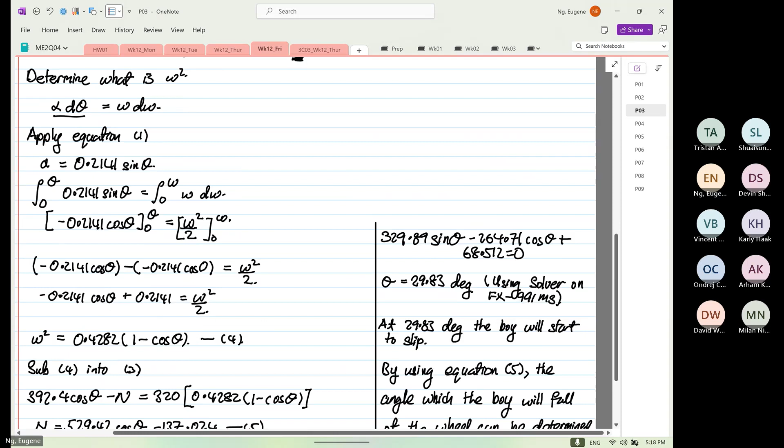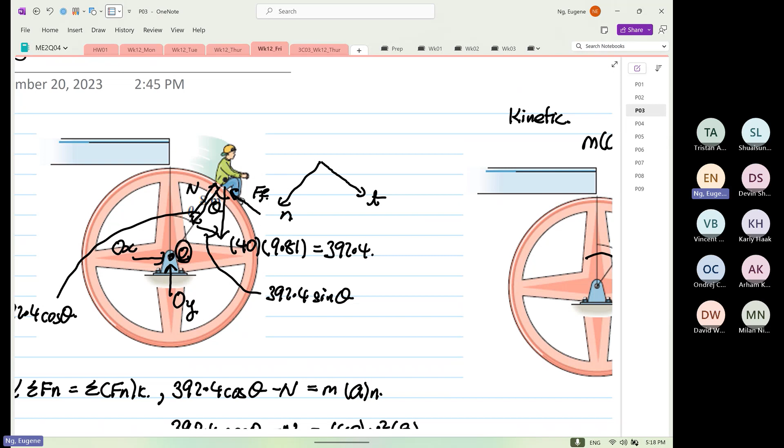So, which value, focus on the boy, okay? Which value will be equal to 0 when the boy falls off? And will be equal to what? 0 when the boy what? Fall off. Okay, so to determine when the boy will fall off, we're going to substitute n is equal to 0 into equation number 5.

So finally, this is 0 is equal to 529.42 cos theta minus 137.024. Theta is equal to 137.024 divided by 529.42, inverse cos, 75 degrees.

So the boy will start to slip. He starts to slip at 29.83 degrees, and then he will roll off. He will go off the wheel at 75 degrees. Are we clear? Okay, this is only true if he doesn't pee himself.

Right? If he panics and starts to piss himself, what will happen? Friction will what? Yes, sir.

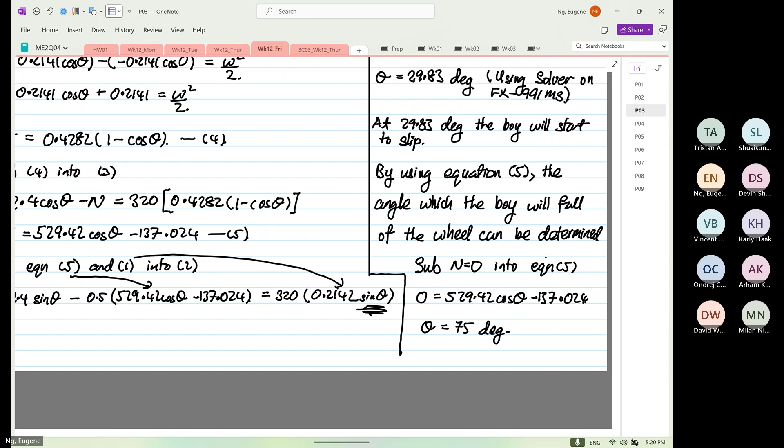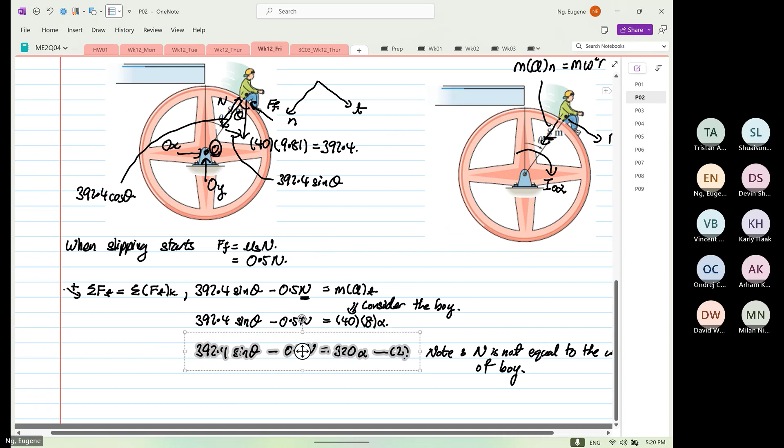Say it again. It's only the wheel. When we were analyzing the wheel, when we were analyzing the wheel alone, that's pretty far back, right? When we were analyzing the wheel on its own, at theta is equal to 0, we just consider the wheel and the boy is not slipping. Then later on, we focus on the what? On the boy, right? Because we don't know what is the what. We have not a clue what is the angular acceleration at all. And we know it's not a constant number.

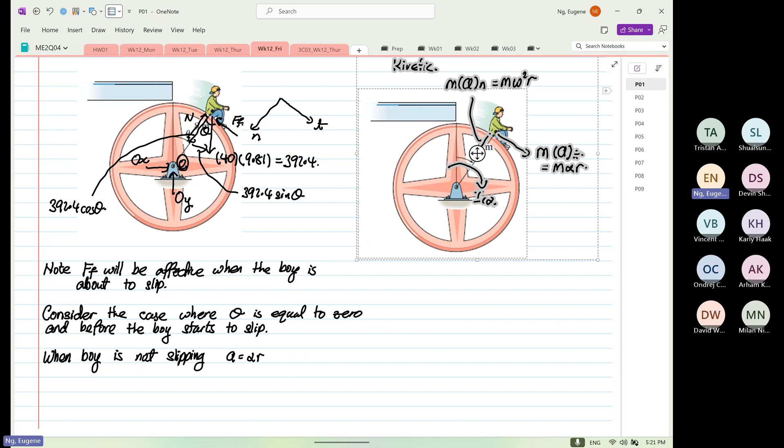Answer your question? Okay, only for that reason, because it's difficult to determine angular acceleration if the boy starts to slip. Okay, not impossible, but difficult. Right. A very interesting question. Now, as I said, if you look at your entire textbook, this is the worst that could happen. I repeat again, this is the worst. Okay. Next, we are going to do an example.

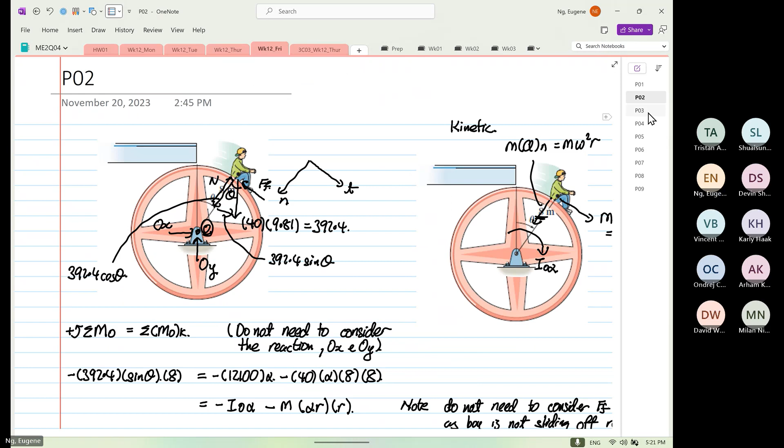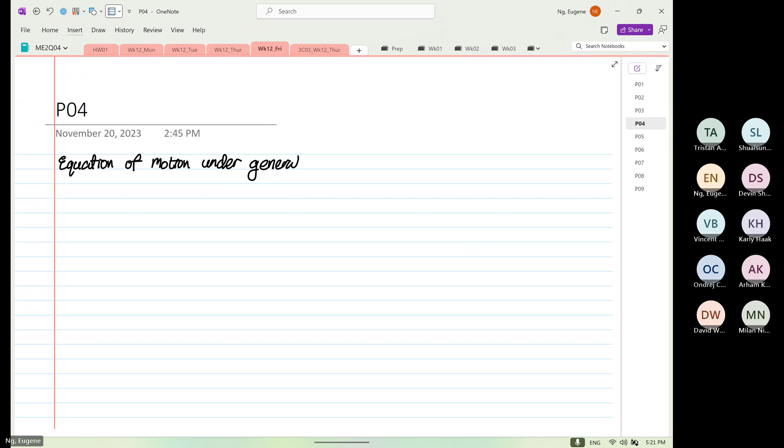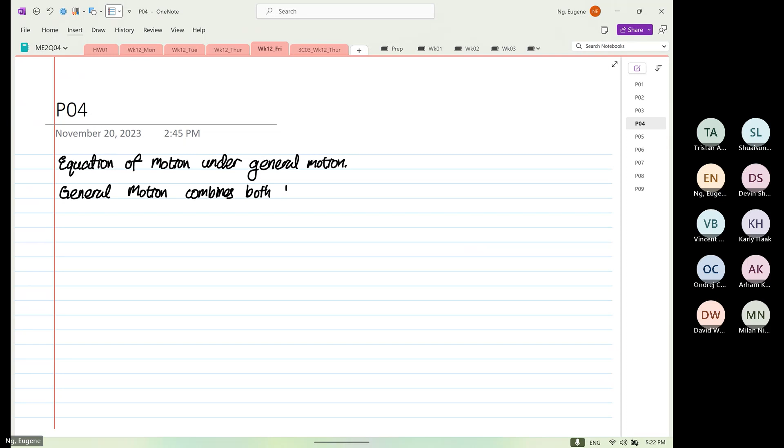Okay, now we are going into equation of motion for general or under general motion. So general motion combines both linear and what? And angular motion. Okay. So the analysis will not change a lot at all, but you just have to be cautious. You just need to focus on how the forces are acting. That's more important. Okay. Right.

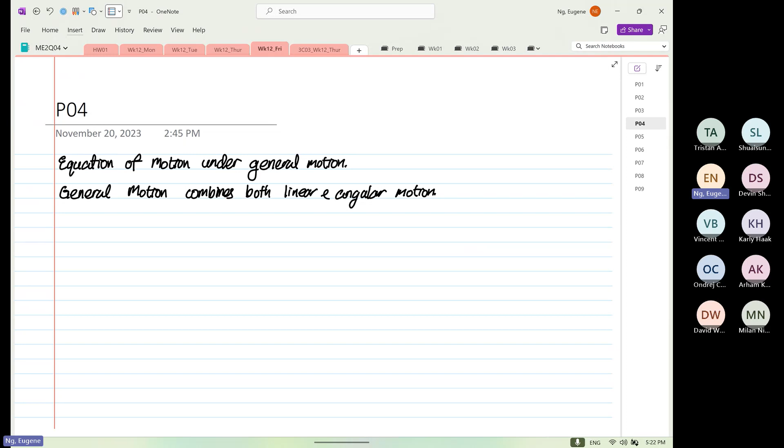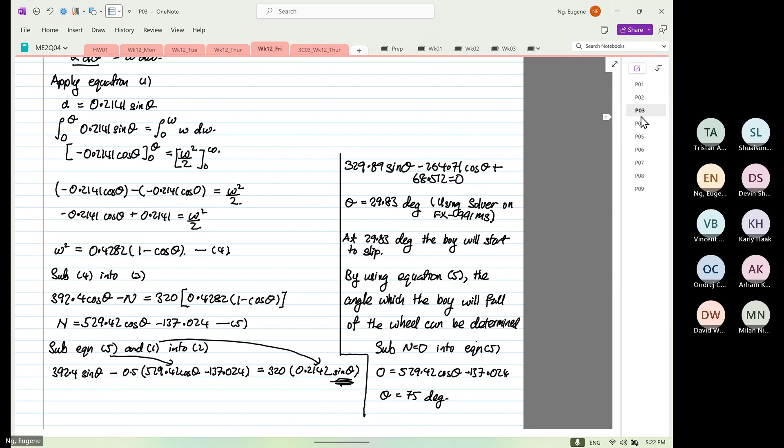So we're going to look into this example now. If P equals 30 pounds, determine the angular acceleration of the 50 pound roller. Assume the roller to be a uniform cylinder and that no slipping occurs.

This question, okay, is not difficult, but you have to focus on this aspect. Okay, which aspect? So the first thing we declare, no slipping. Okay, no slipping, i.e. where there is no slipping, we can use A is equal to alpha R. However, we know that friction force when it's not slipping is not equal to what? Mu N. Okay, so get this into your mind, no slipping.

Now, free rolling, there's another condition known as what? Free rolling, right? Free rolling means what? Remember the car, the front wheels were free rolling. What does it mean? Friction is equal to what? Friction force is equal to what? 0. Free rolling, okay, I'll write down here. When it's free rolling, FF is equal to 0. In real life, is there free rolling? No. Okay. We do free rolling to what? Make the what? Analysis what?

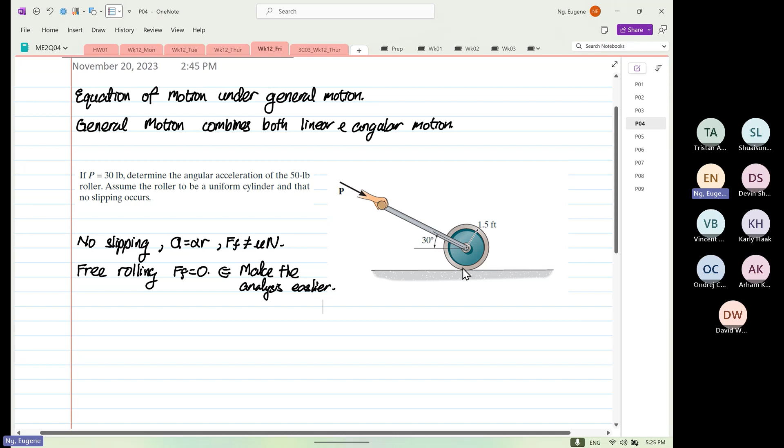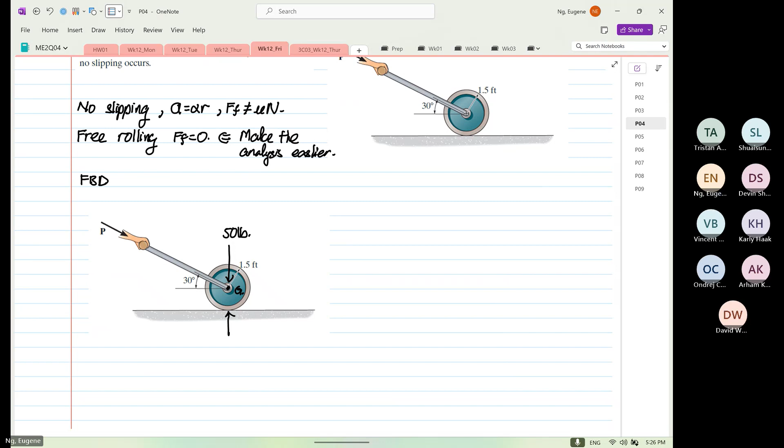The free body diagram. So we are going to look at the free body diagram. We know at the center over here, I will call our point G. And this is going down, and this has 50 pounds over there. And over here we have a reaction, and our reaction is N. And then we have a load coming down over here, and this is equal to 30 pounds.

Friction force. Direction - friction force. Which direction? Friction force to the right or friction force towards the left?

The textbook is so confusing. I'm very infamous for making my own rules. Those of you that have done 3C03 will know that - all the formulas in the textbook, what happened? We threw them in the garbage can. You have to visualize.

Now I'm going to ask you a question. Let's do something physical - that's why we are mechanical. We are going to push the car. Is the friction going against us or helping us?

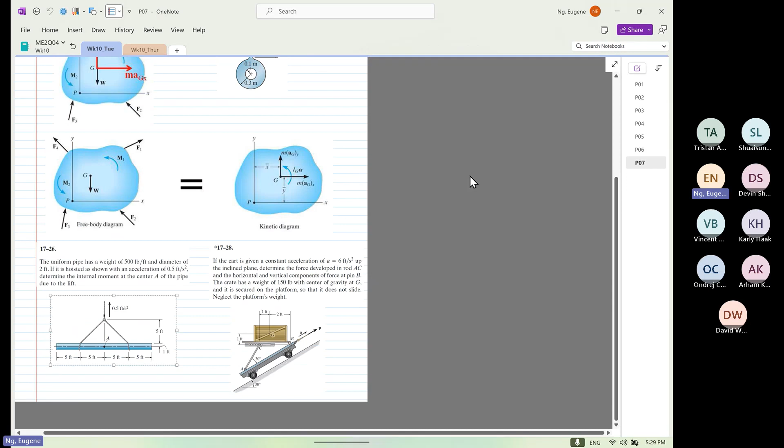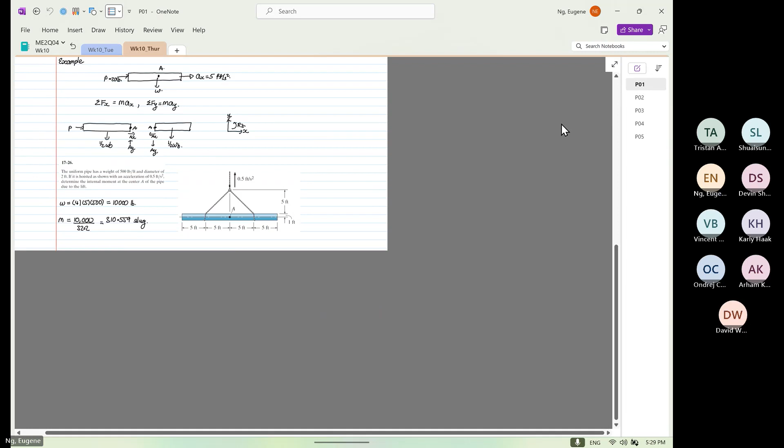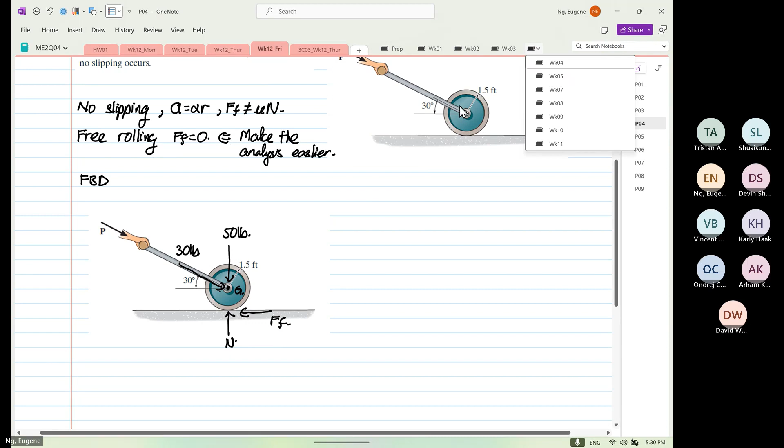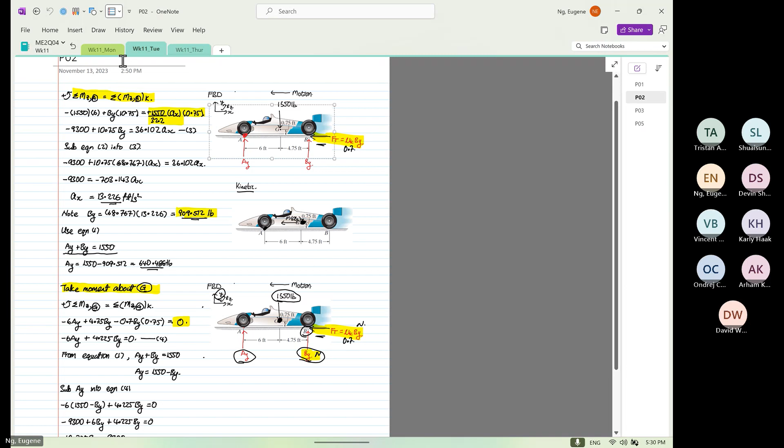So for this case, let me - I hate this, okay. For this case, right, the car is going this way. Yes or no, this is the motion of the car. However, the friction force is together with the motion.

Now we say, Eugene, I'm really confused - Friday 5:30, you have not given us a break. WTF is happening, yes or no?

Why? For this case, how is the car moving? What propels the car? The engine is propelling the car, and the engine is driving the wheels. Which direction is the torque? So now we have to look at the wheel now.

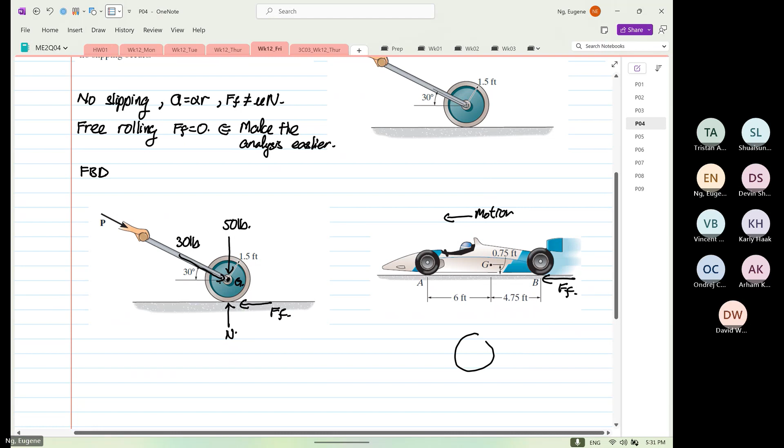We have to look at the wheel now. Okay, so now we look at the wheel. Okay, we zoom in - come on Eugene, draw a better wheel than that. Everything is a circle. The wheel has to rotate in this direction for the car to go forward. Agree or disagree, yes or no? If the omega is that way, torque is in this direction.

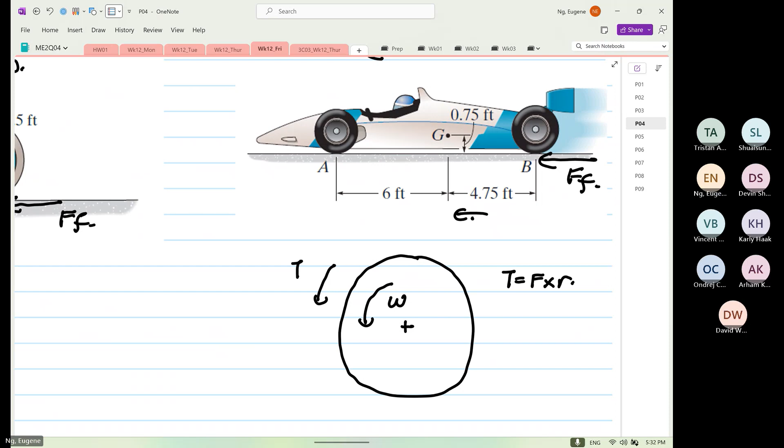Agree or disagree? When torque is in that direction, you know torque is equal to force multiplied by radius. Which direction is the force? So when the direction of the force is that way, what will happen to here? Are we clear? So remember in class...